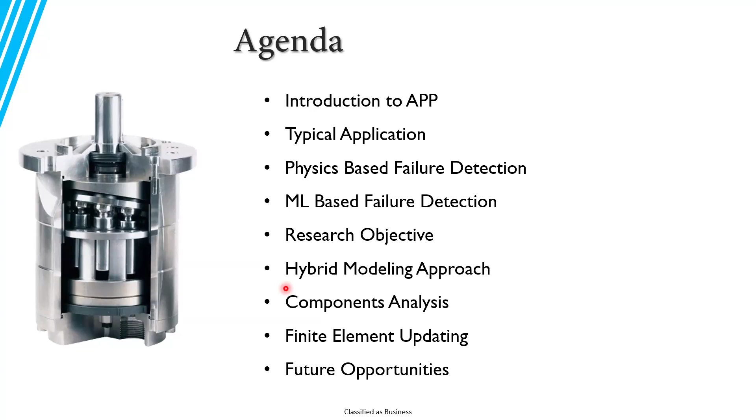So we'll also go through the research objective. And then finally, I'll touch upon some of the topics that I've been working on for the past 2 years, and also what will be the future work that I'm planning to do from now on.

So let's look into the overview of the APP. Here you can see an exploded view of a typical axial piston pump. And I also have a small scaled down version of this pump here.

I used to have an animation here, but that was copyrighted material, so I couldn't show it. But we have a pump here, which consists of a series of pistons. These parts here - I don't know if people online can also see the one I'm holding in my hand - these are called pistons, which is a very tiny part compared to the whole structure.

These move in the cylinder cavity. So there is a cavity here - this is the cylinder cavity. The piston moves inside the cylinder cavity, and for each rotation, this pushes a certain amount of volume of fluid outside the pump, and that is why it is called a positive displacement pump.

That's why it's called a positive displacement pump, because for each rotation, each revolution, you just have a fixed amount of volume that is being pushed. And when you put a restriction on the outlet side of it, then you will start to get your own pressure - so the pressure generates when you restrict the outlet flow.

And in this case, this pump has the capacity being determined by the volume or the size of the housing - this is a small size pump - and also the piston sizing. Apart from that, we have a part called the swash plate.

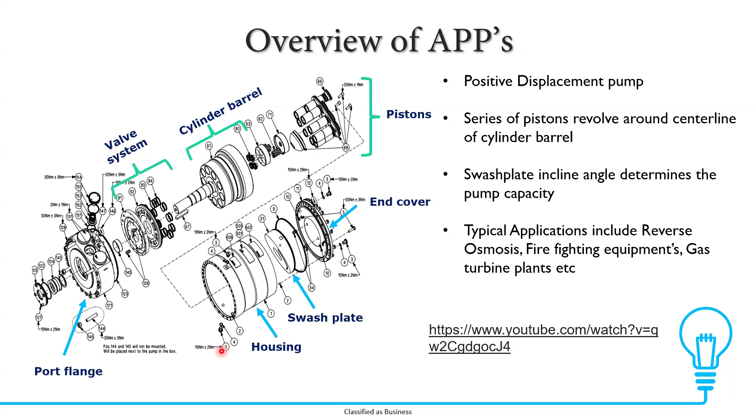And the typical application of such plants - this is purely for water hydraulics, I forgot to mention that point. So the one that we are working on in Danfoss in our group is for water hydraulics.

As I said, we also have something for oil hydraulics, but the volume or the size is very limited because you only need high pressure rather than the volume. But in our case, we also need both the pressure as well as the volume to compete with the centrifugal pumps, because the typical application is reverse osmosis, where we convert salt water or dirty water into clean water passing through our membrane.

And here you can see a circuit which consists of a high pressure pump and energy recovery device. This is also a product which Danfoss makes, but we won't see more about that here.

The idea here is to recover energy, because when you have RO membrane reject, it's rejecting at close to the reverse osmotic pressure, almost 55 bar. If you discharge this pressure to the sea, it's going to waste. The energy recovery device takes this energy, converts it back into mechanical energy, and pushes more liquid into the system. So we don't need as much capacity on the pump itself, and the overall efficiency is really high. We call this the high pressure circuit.

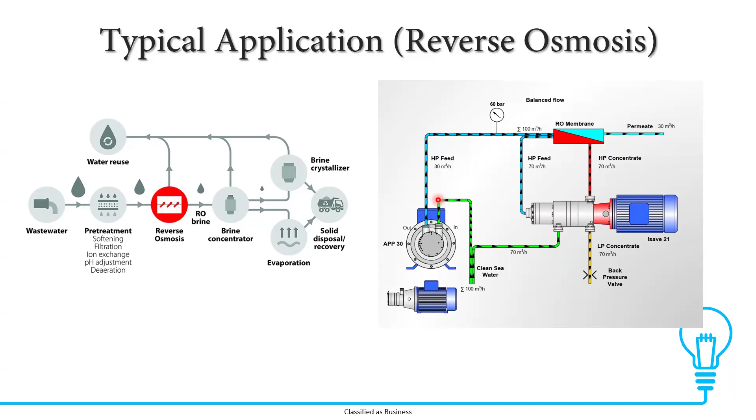One key thing is efficiency, because in a reverse osmosis plant, energy cost is the main cost driver. That's why higher efficiency is quite critical. We have a total efficiency of close to 90 to 95%, given optimal conditions, compared to a typical centrifugal pump which ranges from 85 to 90%. So even a 5% boost gives a lot of savings to the plant.

Now coming back to the condition monitoring part. This journey started about 5 years back when I joined Danfoss. There was a project where we looked at this and realized it's not an intelligent structure - it's basically a steel mass that just runs and produces water when rotated. So we wanted to see if we could make it more intelligent or smart, and how we could detect some of the failures.

So we wanted to detect wear, cavitation, leakage, and safety issues. We went to the literature and saw that we could do this with the help of available sensors such as RMS, accelerometer, flow meter, and pressure transmitters. Sounds good, so we started our journey with this.

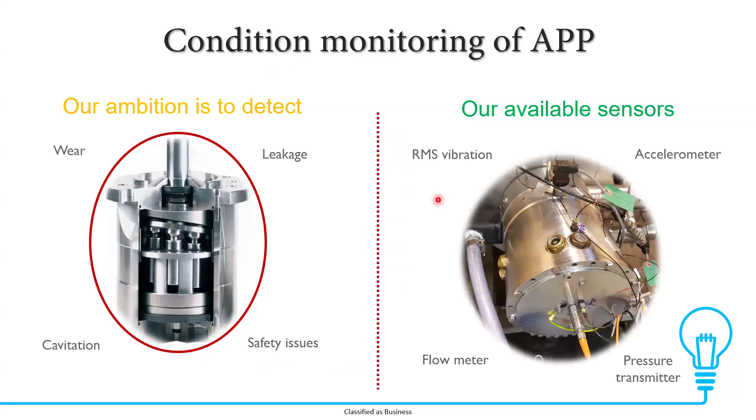With these sensors, we wanted to detect these failures. I won't dive too deep, but these are some of the failures which are the after-effects of the phenomena occurring here. For example, wear causes some physical damage to the component.

Again, it's physics based, using sensors for pressure, temperature, lubrication flow, vibration, and power, which we put on the pump. We have two vibration sensors, one axial and one radial, plus inlet, outlet, and housing pressure sensors, and a lubrication flow sensor.

We also started with an RPM sensor, but found its reliability was much lower than the pump itself. So we removed it and instead calculate RPM indirectly from the vibration sensors.

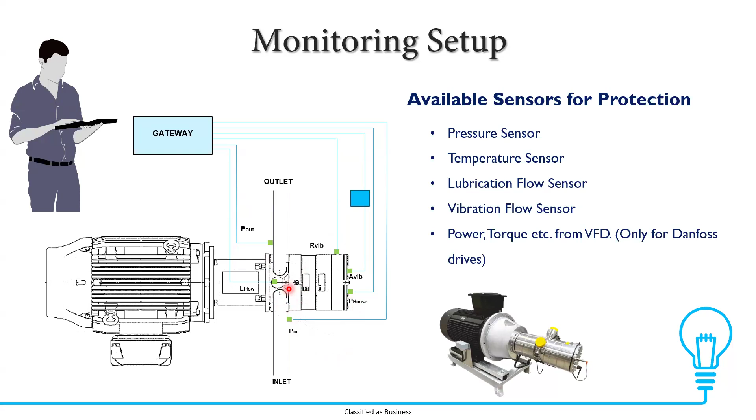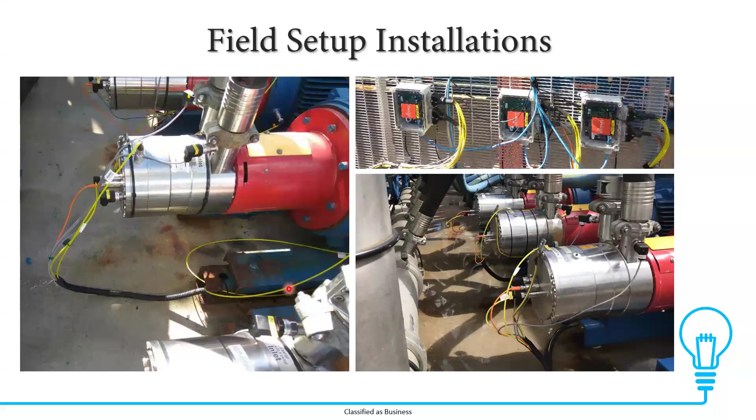So, all good - then we went to the field installation. We set it up with a lot of cables, of course, and a gateway which collects the data in the cloud. Then we started to monitor and waited.

Before this happened, we were waiting for some failure to occur. Though the pump team wasn't so happy about it, we had one failure after 3 years - our first failure. And we thought, okay, now it's the time for us.

The operator heard a loud noise and then stopped the pump, otherwise it would have gotten even worse. The pump was stopped when the operator heard this very loud noise while walking around. It was fortunate that he was having a tour around the pump at the time it failed. So these are some of the signals we acquired from the pump.

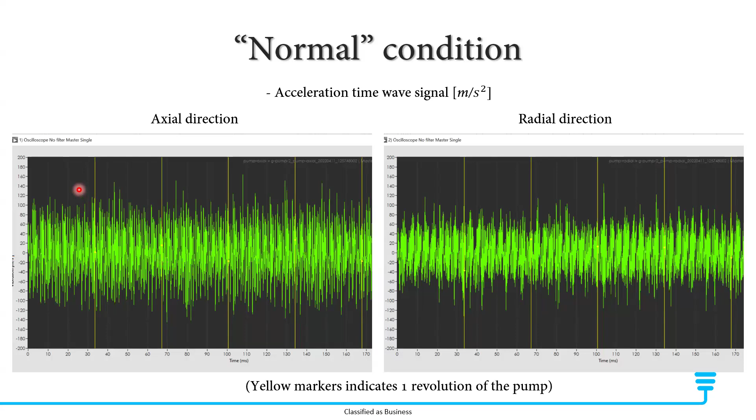And again we do the standard frequency analysis like the FFT spectrum, RMS, peak to peak, kurtosis and things like that, which is standard according to the ISO vibration standards.

We calculate all these features, but what we found is that the quality of the signals we acquire is quite high compared to the running frequency of the pump, because the running frequency is close to 30 hertz and we are acquiring at 48 kilohertz, so we have enough resolution in the signal frequencies.

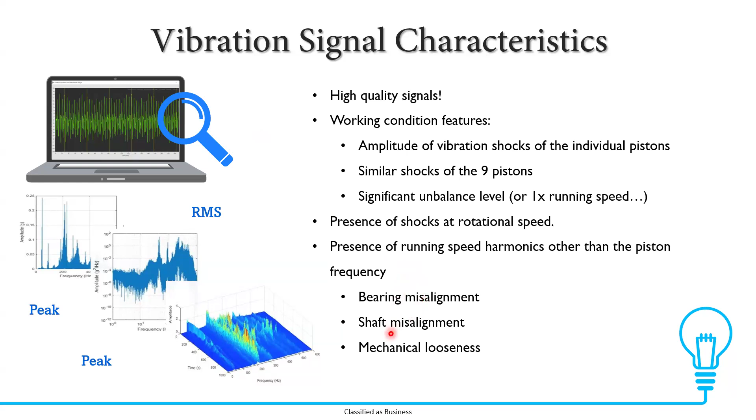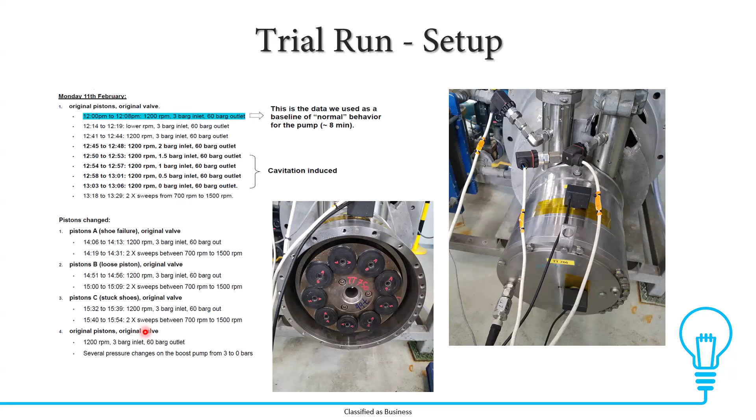So we just fed the data to this model, and then they came back with these 4 nice divisions where we can detect the normal and then the loose piston, damage, and the stuck piston. So of course, this is kind of a supervised learning where we taught the model based on the timestamp, like this data is belonging to the original thing, this data is belonging to this, and then it was able to easily identify, when we then ran the pump again,

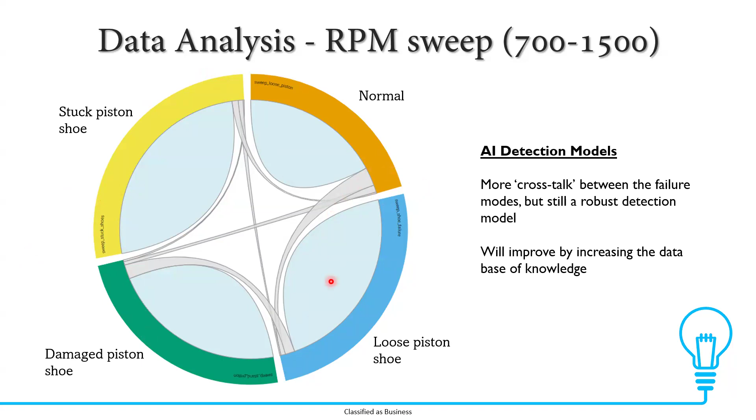it was able to detect the right thing actually. But in the case of the RPM sweep, where it was running from 700 to 1500, here you can see the model was performing below par, where you can see a lot of crosstalk between the different failure modes and the normal modes, and it was not able to detect the same way. But what they came up with is, if we have more data to train, then we will be able to implement this model and improve the model detection capabilities.

So based on this idea, what we did is we took our own thing, because we have these already in the field, so we have enough data in the field. So we started putting these things into the machine learning algorithm, and then we started plotting it in our own method. And here we can see this is a normal pump, and even with the normal pump, you could see there are 2 clusters forming already.

And we could not explain what is happening here because when we open the pump and inspect the pump, we could see that everything is fine and pristine. So we couldn't detect physically any damages or any changes to the pump. So then the confidence even went down. Okay, so now even for a normal pump, if it is clustering, what will we do? How can we explain it to the customer?

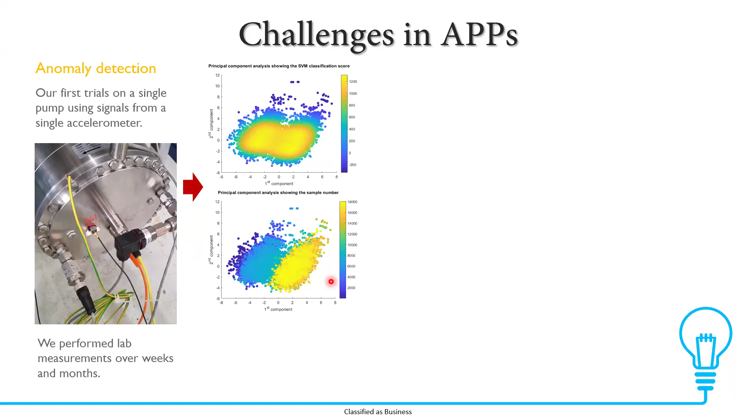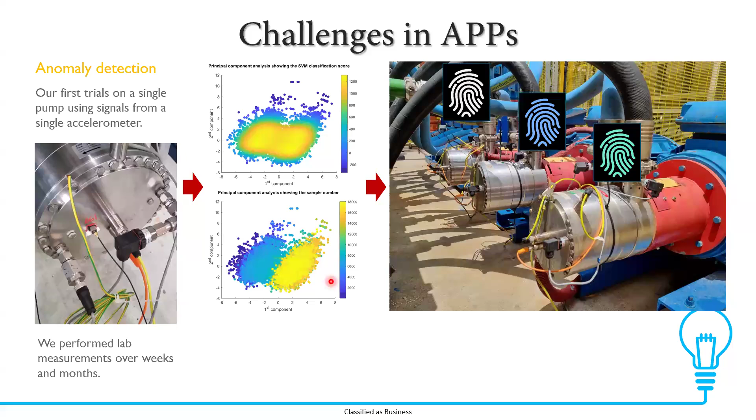So again, the machine learning also failed, and then we also found that the pumps have different characteristics on their own for the physics-based failure detection also. So what can we do? This is what the challenge is. So this is what led me to the research basically.

This is a summary of it. We know that the pump dynamics change between each start and stop, and each pump is different and has its own fingerprint, which we saw earlier. Also, the number of failures in the field is very limited. We had like 1 or 2 failures in the field so far, and we couldn't do much with the failure data. And most failures are catastrophic, so we are not able to find the root cause for the failure itself, and it was beyond investigation.

And also there is a lack of failures, but also a lack of literature for water hydraulics, because for water hydraulics there are certain phenomena, like cavitation, which is one of the main causes for failure in some of the parts, which is not the same for oil hydraulics. So we don't have enough literature to work with the water hydraulics part. So that's where we came up with an idea.

So to solve the pump dynamics part, can we use the digital twin, like a finite element model, to study the force variation and quantify these force variations? Again, each pump is different. So can we understand the cause for the variability and then eliminate it by using finite element model updating, eliminate it from the model itself, so that the characteristics from the dynamics are separated from the uncertainty.

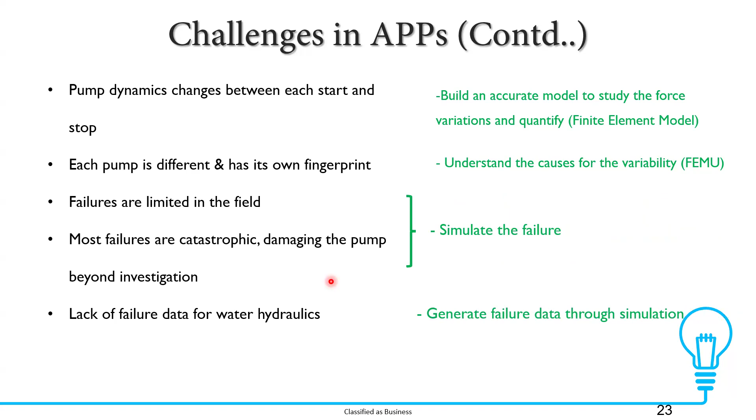And of course, for the failures, we can simulate the failures. If we have an accurate model, then we can simulate the failures and generate the failure data through the simulation. Simulation we can run even without any failures. We only have to have the computation power to run through the simulation to generate the failure data. And this is what my research is all about.

So we have divided this task into 7 work packages. Of course, as with any research, the first one is the literature survey. Then we have the FE model, and we wanted to then introduce the uncertainty part in the FE model. And we wanted to do an extensive testing to capture the variabilities and update the model based on the experimental data and the FE models.

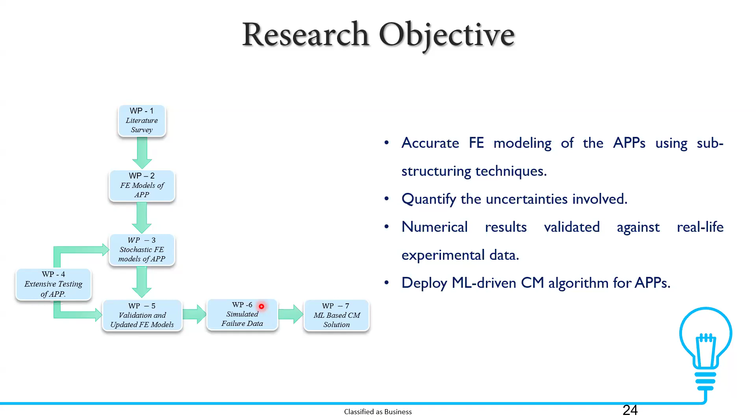So currently I'm in this phase now in the module 5. And once this process is done, then we will simulate the module 6 and 7. Module 6 is simulating the failure data, and module 7 is ML-based CM algorithm or CM solution once we have the failure data from the digital twin.

And here we propose this hybrid modeling technology because we also have access to the simulation as well as the experimental data. So we do the FE modeling, we do the modal analysis, and then we extract the frequency and the mode shapes here. At the same time we do the experimentation and extract the modal parameters using SSI, and then do this FRF-based modal match, match the modes using the FRFs,

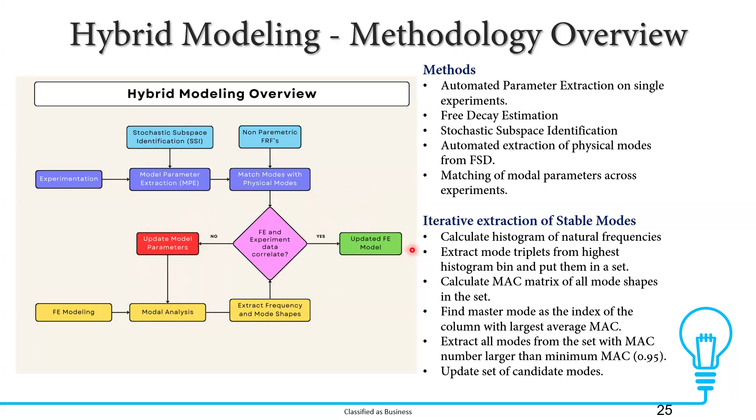and then see if these two can match. And if they don't match, then of course we have to update the model in here, then do the modal analysis, and until it matches, we do the model updating, and then we have an updated FE model.

So yeah, this is the same put in other words actually. That was in a flowchart, and here it's in a form where we are trying to capture the assembly dynamics in the stationary components through the FE model, and then the internal components through the data-driven model. And when we assemble them together, then we get the whole APP assembly. So that's the idea at least.

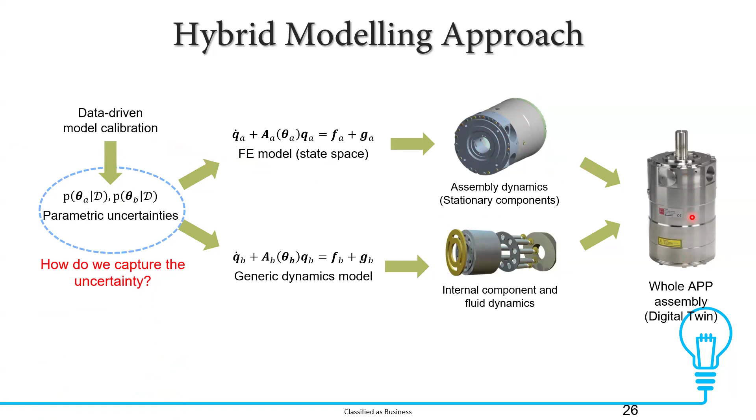And then we call this the digital twin, so that we can generate whatever data we want from this digital twin. So then comes how can we capture the uncertainty part? And this is what I've been doing for the past 2 years. So we have been working on this. Of course, there is a lot of literature available on this. So we have been doing the impact testing, shaker testing, and then see which one was suiting for us.

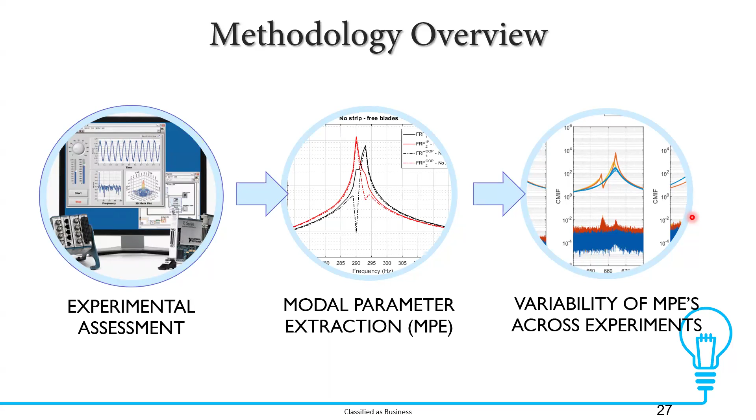And then we have extracted the modal parameters. And from this, we have studied how much the modal parameters vary. And based on this, we also plan to do the model updating. So this is kind of an overview of it.

So first part is the experimental part. The pump itself is so complicated actually. So if you want to develop a method for the whole pump, I think it's probably not a 3 years PhD. It takes probably a lifetime of effort to develop it for the pump. So we started with a simple component, which is the housing here. And we started to quantify all the uncertainties that can happen. So one is the manufacturing variability, the other is the material properties, and then the boundary conditions.

So in order to do the manufacturing tolerance variations, we did more than one component in the shaker test. We couldn't have a bunch of components, but in order to have at least simple statistics, we did it on 2 housing components, and we did it on 3 boundary conditions. So one is on the hard foam, the other is on the soft foam, and the third one is hanging in the bungee cords actually.

And we did this repetition 10 times, and each repetition was repeated 5 times. What I mean by repetition is between each repetition, we disassemble the whole thing and assemble it back again. But in this condition, we repeated it 5 times. So why we did it is we wanted to capture the measurement chain variations, which is captured by repeating the experiment in the same setup.

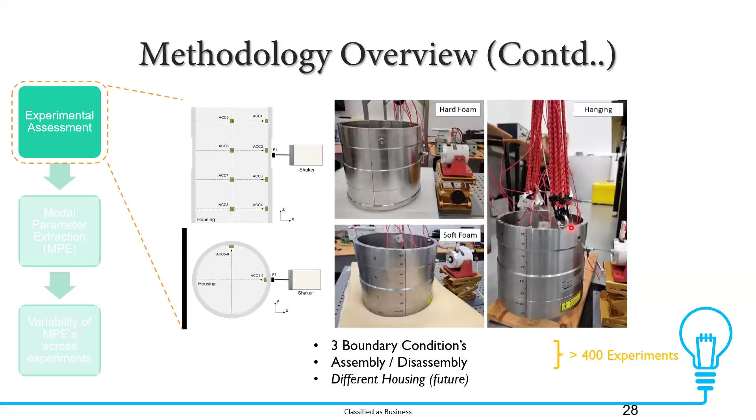But then we also wanted to capture the assembly variations, which is removing and connecting it again. So in this way we could simulate both the assembly chain as well as the measurement chain variability. And of course, the boundary conditions will change here. And we did a total of 400 experiments. I will quickly run through this.

I don't know how long should we present. We should leave some question time, right?

Okay, yeah. Because I have also made a paper on this and presented it at the EWSHM last year, this June actually.

So here again, from the nature of the component itself, we could see we have very closely paired modes in this case. So there's two modes that are very closely paired. We could clearly see the difference in this case here, but there were also two modes in here which are not clearly seen. So if you use a peak detection method, I think we won't be able to detect the two peaks here clearly.

And similarly, here we have a difference in the change between the support conditions. The red one is the hanging boundary condition, whereas the blue and the green are on the foam. Of course, the stiffness changes between the soft and the hard foam, but we could see they are both matching the eigenfrequencies, whereas in case of the hanging, it was shifting a bit.

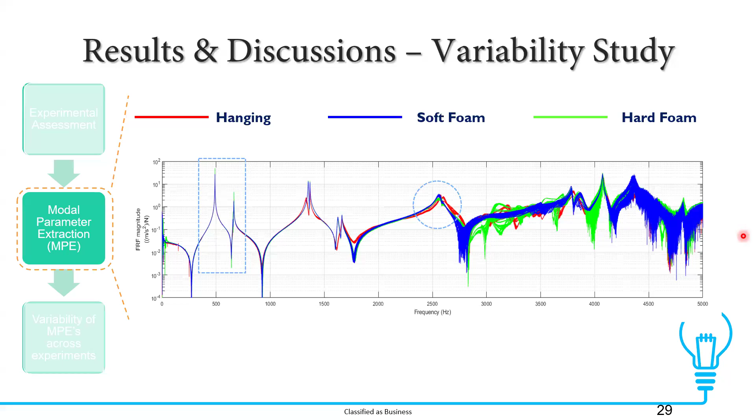And in this case here, again, we could see there are two modes in the foam support, but in the case of the hanging, we could not detect the second mode. It was only detected as one mode here. Okay, I'll zoom here. So this was the observation from the things.

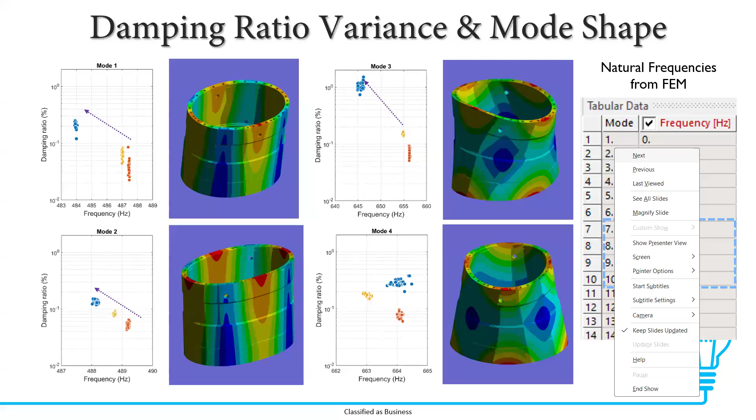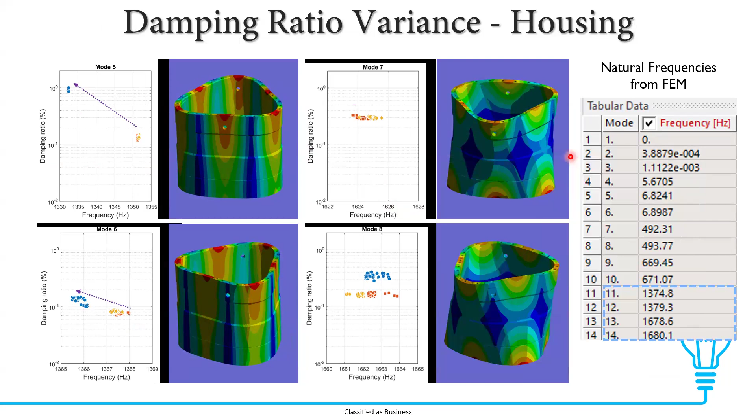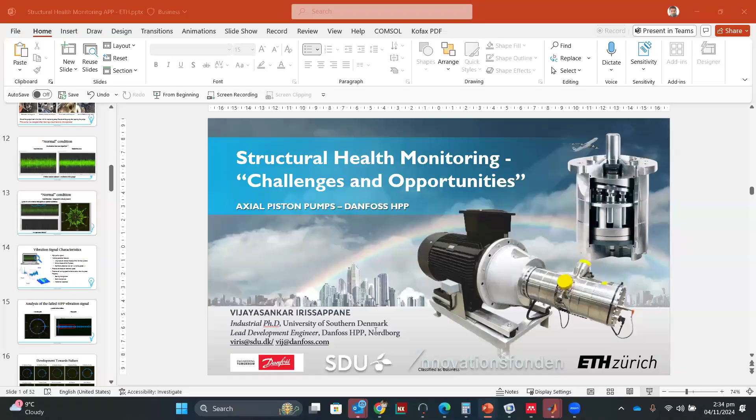And here, I think the next slide I'm summarizing the whole thing. Let's see. Yeah. No. Okay, this is hidden. Sorry.

Yes. So here is the summary of the outcome from the experiment. You can see the boundary condition, the support, has maximum impact on the eigenfrequencies and also the damping ratio. So this is a plot showing the frequency versus the damping ratio. And in some of the cases, we were not able to excite the modes exactly. For example, in mode 7, as I said, we were not able to see the modes in the hanging condition; that could be due to the lack of excitation. So we couldn't excite this particular mode when it is hanging because of the free motion.

But in all the other cases, we could see that the hanging boundary condition had a lower shift in the natural frequency compared to the foam-based support. Whereas in case of mode 8, it was all in the same frequency range, but the damping ratio was changing. So this was key for us to further work on the parameter model updating.

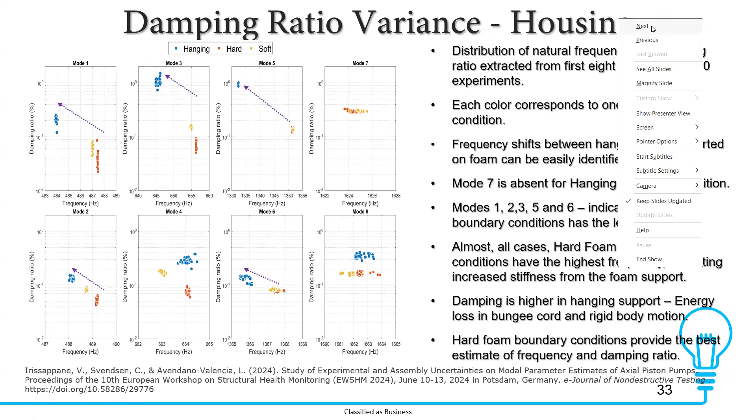And here is the reference for the paper, the EWSHM. Why is it slow? A lot of pictures here.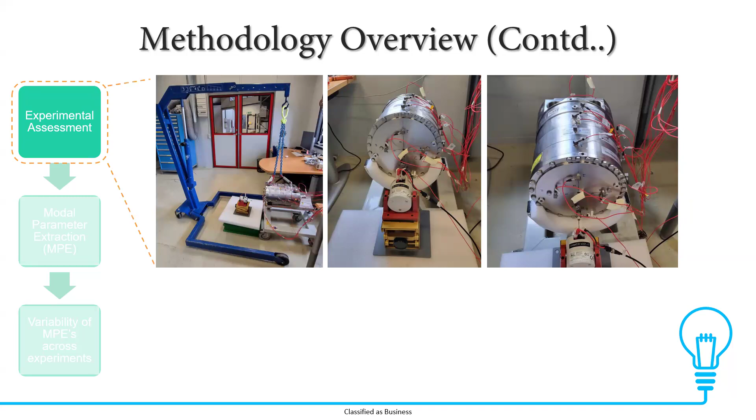Okay. And then after this, we continued with the whole pump. So this is the whole pump setup. We started again collecting a lot of data for other components like the cylinder barrel, the whole system that I mentioned in the first slide. So we ended up with more than 1,000 experimental data sets actually. I have access to these 1,000 experimental data sets. If anybody wants to work on them, you're welcome.

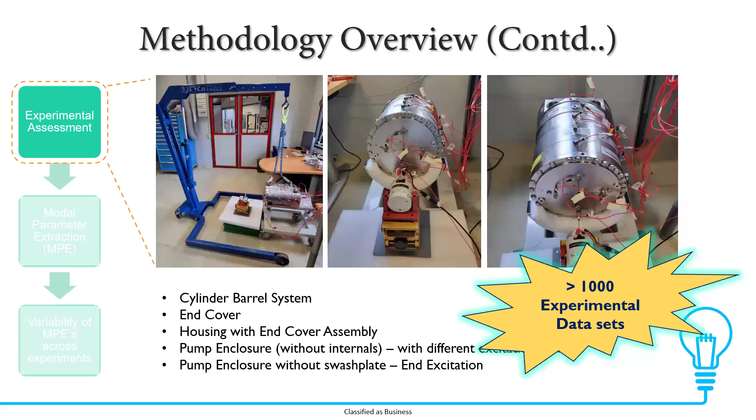But the plan here is to extract the modal parameters from these and then use that for updating the finite element model. So this is what I've done so far. And now I'm going to focus for the next 5 minutes quickly on the part I'm doing right now. Of course, we wanted to do the model updating on the finite element. So directly applying it to the pump was a bit of a challenge.

So we took a simple example of the beam. We did the same experiment on the beam. We did exactly the same steps. Of course, we can solve it analytically also. We can get the mode shapes here in the analytical form. Then we did the same steps like exciting with the shaker and then calculate the FRF and the coherences here.

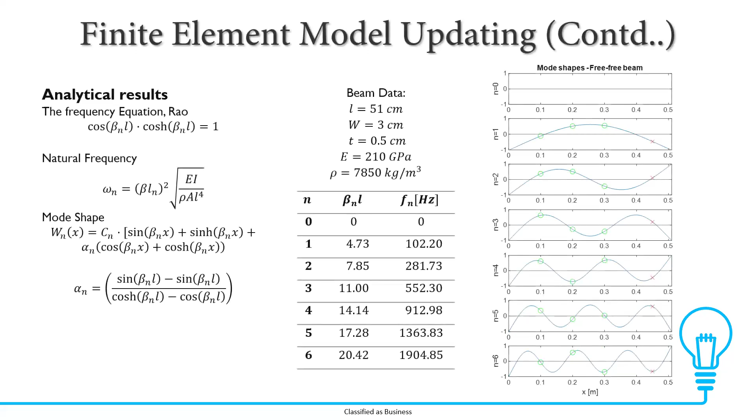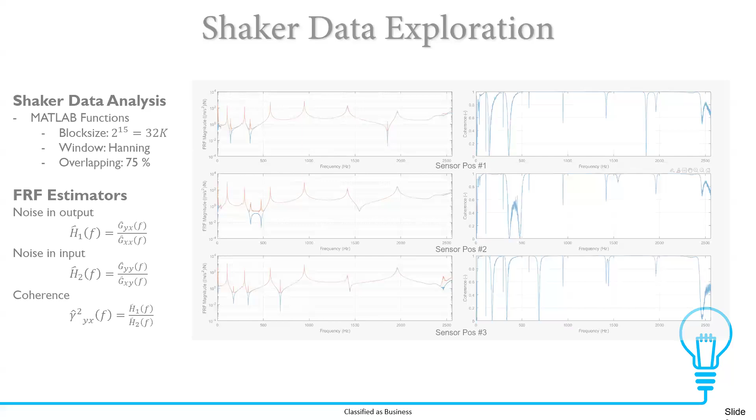We could see very clean things on three. Okay, I just forgot. Like here in this case, we had three sensors, and the excitation was at the 0.0 here. So we had measured the three sensors here, and these are the three outputs from the three sensors. And then we also did the SSI here and extracted the stable modes.

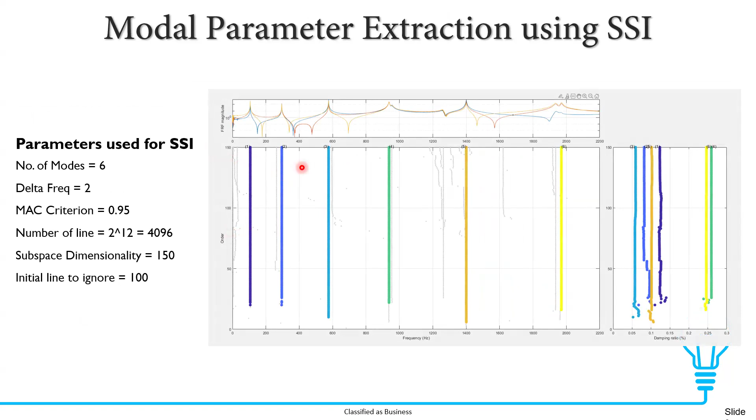So in this case, of course, we don't have the closely paired modes because it is a beam. It's not symmetric. So each mode was clearly identified and was able to clearly run, and it was also faster than the SSI on these ones and easy to identify them. We then went to COMSOL, solving the same problem, and extracted the mode shapes and the mode frequencies from there. And we extracted the K and M matrix from COMSOL.

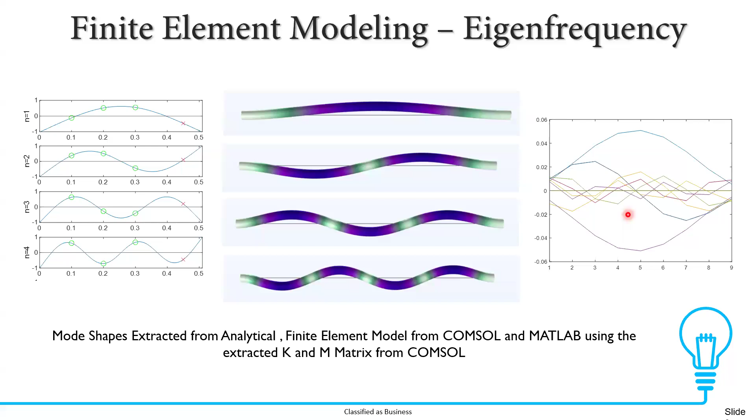We then took it to MATLAB and started the finite element model updating part using MATLAB. And here you can see we used only the eigenfrequency as a parameter for updating the model, but also we used the modal assurance criterion to match the frequencies.

So sometimes, when there are closely paired frequencies, the mode shapes will vary a bit. As in the case of the housing, when you have a closely paired mode, you have one mode on this side and the other mode which is perpendicular. So in this case, the frequency will only vary slightly, but the mode shape phase will be out of phase. So even though we are using only the eigenfrequencies, we wanted to also take the mode shape into consideration with the MAC, to match the right mode shapes to the right eigenfrequencies.

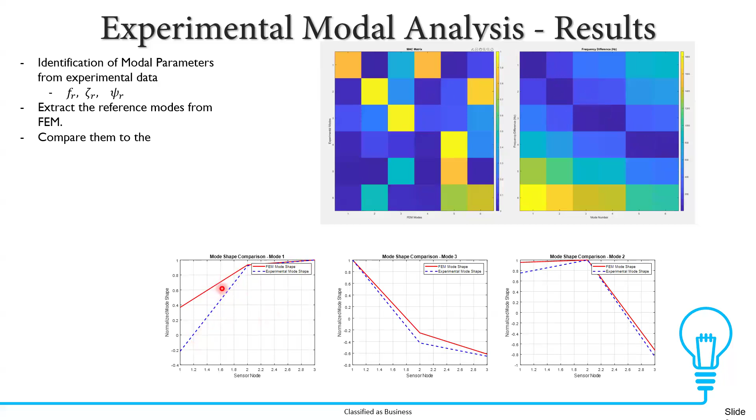And we did that here. You can see the first three modes are quite clearly matching on the MAC as well as the frequencies here. And this is a mode from the FEM mode shape, and the dotted ones are the experimental mode shapes. And we then used the eigen sensitivity based method for updating the finite element model. We could achieve a very good result from these. I think that is probably the end of this presentation.

Of course, for the next steps, we wanted to extract the statistics of the modal parameters. So we have the 1,000 experiments. If you solve it 1,000 times in this FE, we get similar results on the FE part, so we won't be able to capture the variability. So we wanted to come up with the statistics for the modal parameters extracted using the experiment and then propagate it to the FEM parameters, for example, the Young's modulus or the support stiffness. How much variation on these parameters will give us these variations on the modal parameters.

Solve all the finite element models like we are now doing for each individual component. We did the experiment, solved the FE model, and propagated it according to the sensor positions to see if we can get the same results. And of course, we will not get the same results. So we wanted to update the finite element model based on this, then assemble the complete updated model, and we will get the final pump model. And then, as I said earlier, we will use this model for simulating the failure data, and we have the possibility to validate the same through experimental data from the lab in Danfoss.

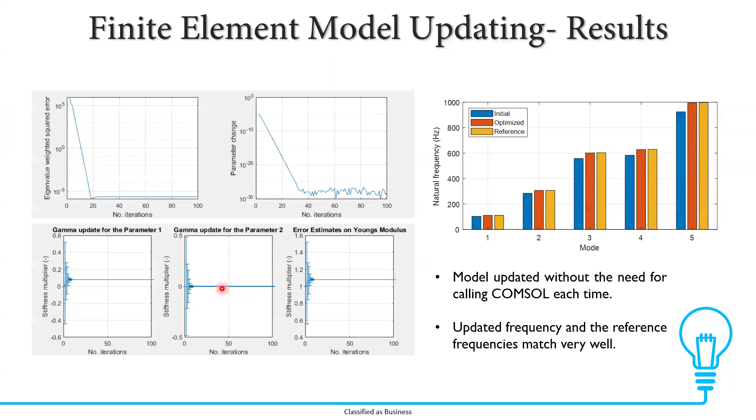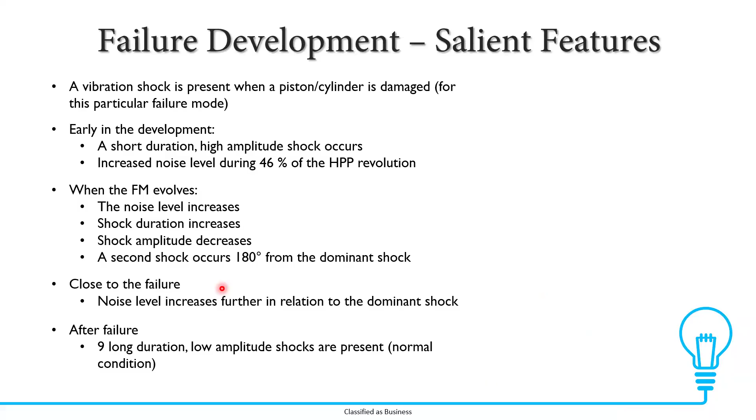This is the PEEK material, this damage. We have seen in many cases that when the PEEK wears out, a steel-to-steel or metal-to-metal contact gives us a sudden failure. But if we can capture a method for detecting wear in the pistons, that would be nice. We can model this wear by reducing the thickness of the PEEK and seeing what the effect would be. If there is only one piston affected, we have observed it has a different shock compared to the other eight pistons, because the clearance is a bit higher, so it has an extra double shock - you can have some kind of warning before the failure.

Yes, we could have, but as I said, it's not common for all the pumps. No, I was just wondering - before, you just have this breaking and it doesn't help too much, since it's broken already.

Yes, we have also done this - it's not part of the presentation here - but we have a lab in Denmark where we also do monitoring. What we do there is put very close threshold limits, where we have more false alarms than false negatives. With the customer we couldn't do that, but in this lab case we could, and we stopped some of the pumps before failure. We could see one of the rings was open, and in some failures one of the springs was broken, things like that. So we have a database we're collecting with different failure modes also. So that is possible. Thank you.